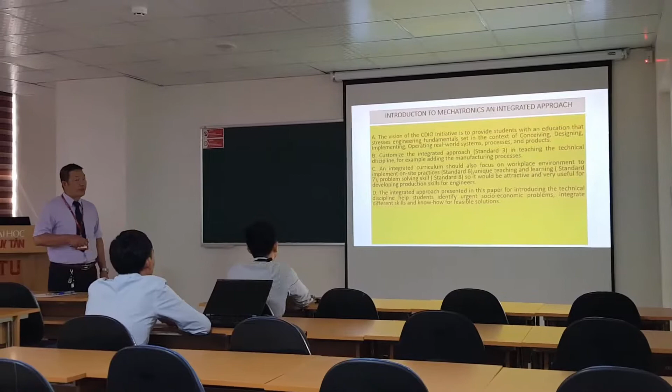First, the vision of the CDIO initiative is to provide students with education that stresses engineering fundamentals set in the context of four stages: conceiving, designing, implementing, and operating real-world systems, processes, and products.

The second point is to customize the integrated approach. Standard number 3, in teaching the technical discipline, for example adding manufacturing processes. Next, an integrated curriculum should also focus on the workplace environment to implement on-site practice. That's standard number 6. Unique teaching and learning is standard number 7, and problem-solving skill is standard number 8. So it would be attractive and very useful for developing production skills for engineers.

And the last one: the integrated approach presented in this paper for introducing the technical discipline helps students identify urgent socio-economic problems and integrate different skills and know-how for feasible solutions.

Here we introduce four parts. First, introduction. Second, CDIO standard number 2 and number 3, refocused for the conceive and design stage. Next, refocus of standard number 6, 7, and 8 in the implementation and operation stages. And the last one, conclusion.

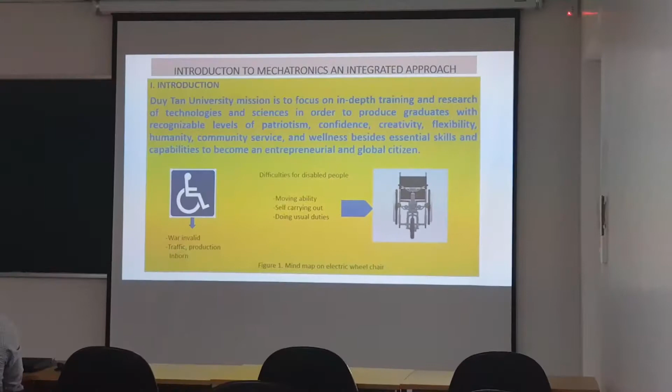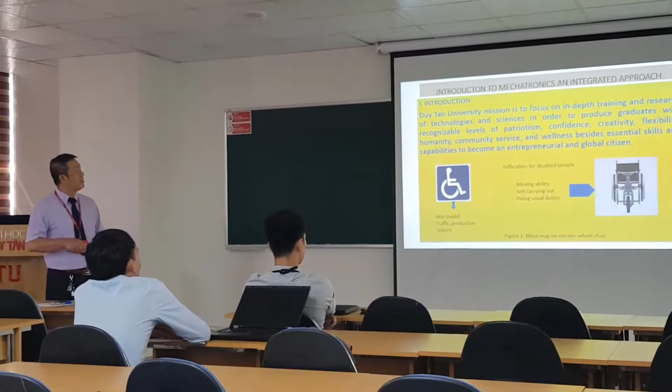Here I would like to pay some attention to the mission of our Duy Tân University. As I told you, I am working for Duy Tân University. Its mission is to focus on in-depth training and research of technology and science in order to produce graduates with a recognizable level of patriotism, confidence, creativity, flexibility, humanity, community service, and wellness, besides essential skills and capability to become an entrepreneurial and global citizen.

Here we pay attention on what? Humanity. And this is also the difference in my integrated approach, because besides simultaneously applying all standards in preparing the curriculum and in teaching, we pay attention to the humanity side of our teaching activity, and we will show how we can integrate this side in preparing curriculum and teaching our Vietnamese students.

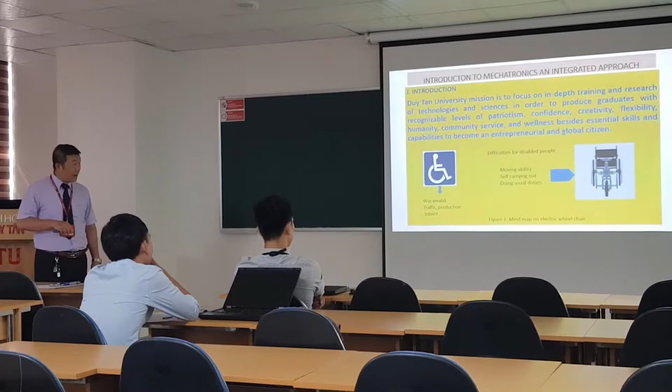As we know, the invalid may be so from the war, from traffic accidents, from production accidents, or inborn conditions. What difficulties do the disabled people face? First, moving ability. Second, self-care, which is very difficult. And the last, doing usual duties. So what can we do to help resolve this problem for disabled people?

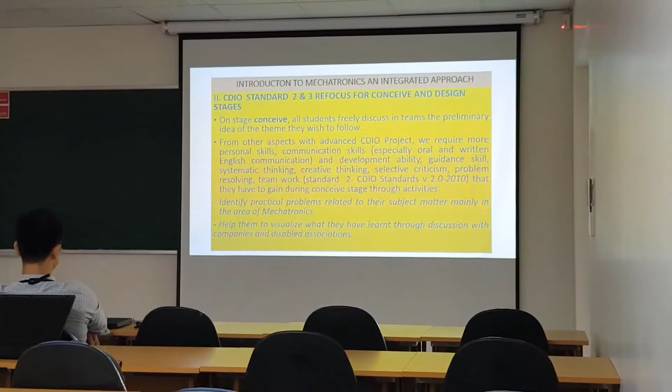This is a mind map on the electric wheelchair, and our students paid attention to this product. At the conceive stage, all students freely discuss the problem and they can propose any model, any opinion, and discuss among themselves. But the instructor always follows and gives advice as a coordinator, so that our teaching staff can help them develop guidance skill, systematic thinking, creative thinking, and selective criticism, problem resolving.

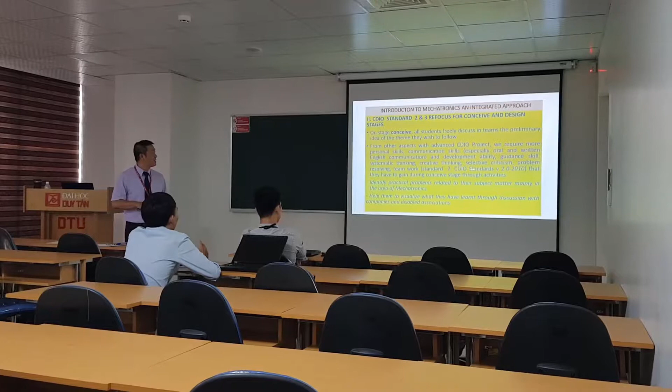This is the content of standard number 2 in the CDIO standard. Namely, the students have to identify practical problems related to their subject matter, mainly in the area of mechatronics. We also have them visualize what they have learned through discussion with companies and disabled associations. We encourage all students to be receptive to making changes in their initial plans based on the information they obtain in meetings with disabled people, associations, and companies.

We can also apply a flexible model to catalyze discussion, giving students a personal viewpoint on discerning information. But we focus on the problem—which problem might be social in nature or demanded by the company in the area of mechatronics. Because, as I told you earlier, we especially pay attention to the human side in teaching, in research, in all education activities. And this is different in our methodology.

We not only apply the CDIO standard, we apply several standards simultaneously in preparing and teaching education activities. But we also focus students' attention on the human side in education and in teaching technical discipline. This is the difference in our approach.

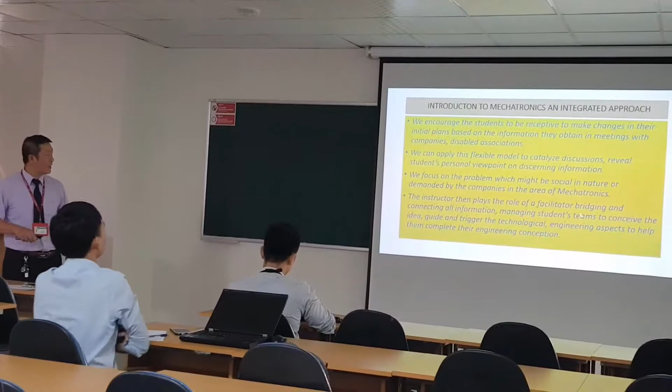And finally, the instructor played the role of facilitator, bridging and connecting information, managing the student team to conceive the idea, guiding and triggering the technological engineering aspect to help them complete their engineering conception.

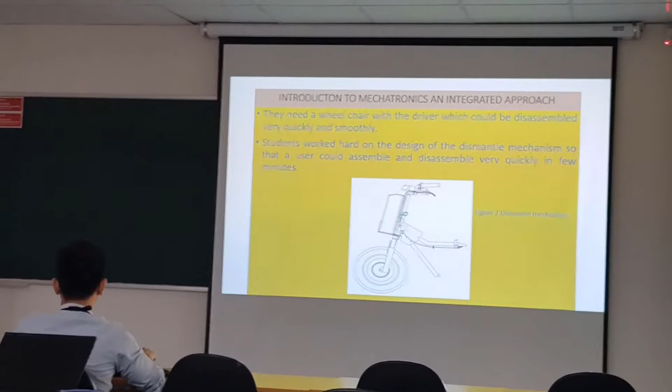What is difficult for disabled people? They face problems that make it very difficult to move and to do their usual duties.

So if we pay attention to something like a wheelchair, we have to design it to be very smooth and to quickly disassemble in a few seconds. It will be very useful, and students worked hard on the design of the dismantling mechanism, so that the user could assemble and disassemble it very quickly, in a few minutes. This is the core value of the students' design.

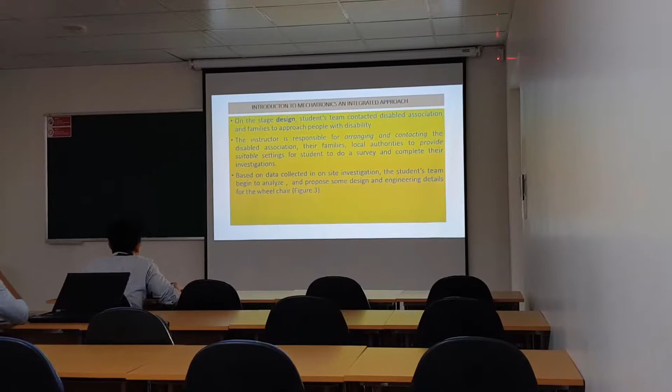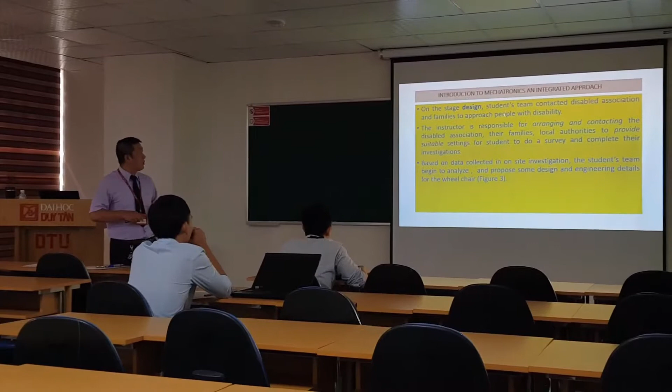So we finalize the first stage, concept. Now we pass to the second stage, stage design. The student team contacted the disabled association and even their family, so they can approach people in close contact and gather necessary information to improve their design.

What is the role of the instructor in this stage? The instructor is responsible for arranging and contacting the disabled association, their family, and local authorities to provide a suitable setting for students to do a survey and complete their investigation. Based on the data collected from the site investigation, students exchange opinions, analyze, and propose some design and engineering detail for the wheelchair, as we can see in figure number 3.

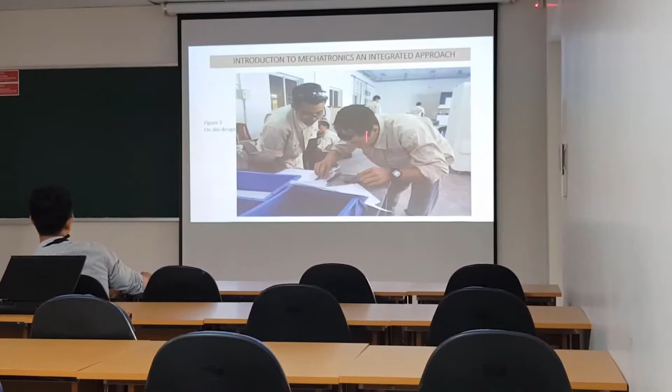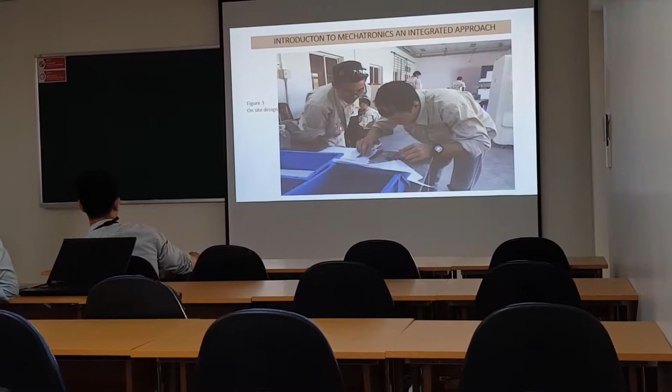Here, the student team in our workshop at the university is collaborating, exchanging, thinking, and finalizing the design of the wheelchair model.

Following a chain of 20 activities, all students are asked to actively suggest implementation of their models, fabrication proposals, and product analysis in small teams. They are required to collaborate, discuss, propose, critique each other, and provide feedback.

In this stage, we provide students the knowledge and experience in fabricating a wheelchair to improve practical and professional skills, and problem-solving skill. This is the content of standard number 8.

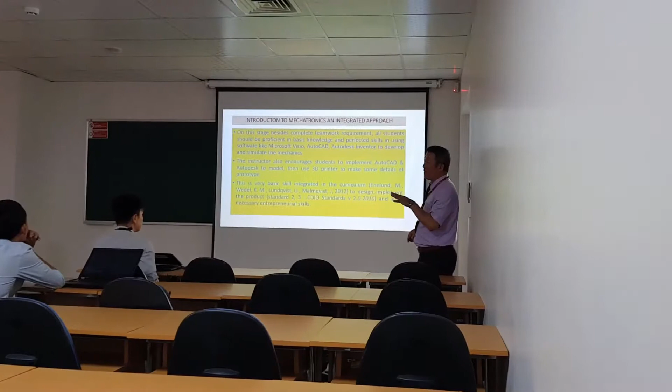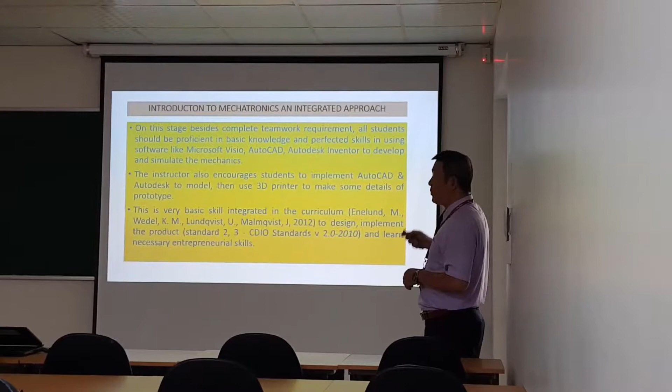At this stage, we show students the useful application of knowledge from other subjects and other tools to improve their implementation stage. Namely, we apply Microsoft Visio, AutoCAD, and Autodesk Inventor to develop and simulate the mechanics.

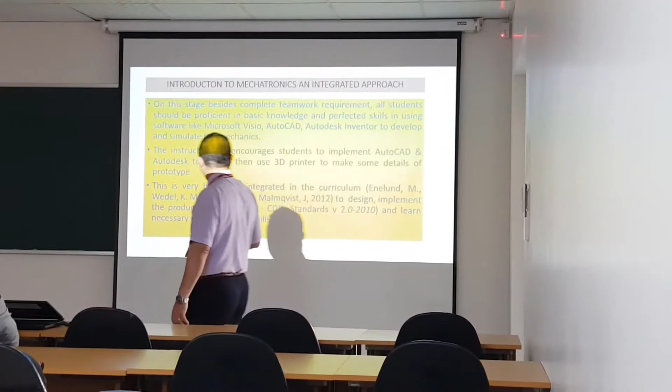We also encourage students to use AutoCAD and Autodesk to model, then use the 3D printer to make some details of the prototype. Students understood that this is a very basic skill integrated into the curriculum, to design and implement the product—standard number 2 and number 3—and learn necessary entrepreneurial skill.

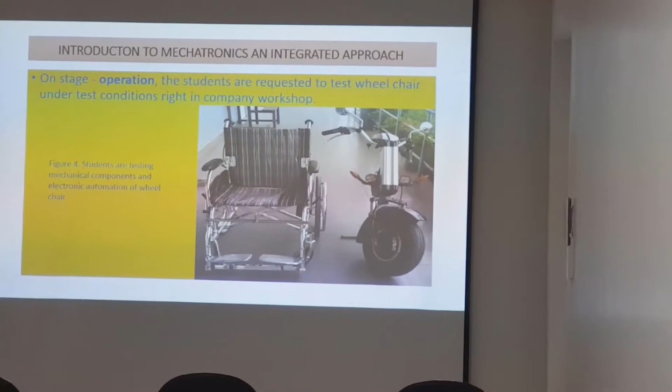The last stage, as we understood, in CDIO methodology is operation. What students do at this stage is test the quality of the wheelchair under test conditions, right in the company workshop. As we see here, under the guidance of our instructor, students test the wheelchair.

Here, a student has already finished the design of the wheelchair and engineered it in the CE workshop. CE means Center of Electrical and Electronic Engineering.

Normally, what is the difference in advanced CDIO projects? In advanced CDIO projects, we target additional tools, providing students more experience and entrepreneurial skill. So we have more criteria for evaluation: practicability, completeness, and flexibility in production conditions.

Normally, one project is evaluated by a complex series of criteria such as relevance, fulfillment of objective, efficiency, effectiveness, impact, and sustainability. As instructors, we follow all criteria, but we pay more attention to entrepreneurial skill and integrated approach in assessment.

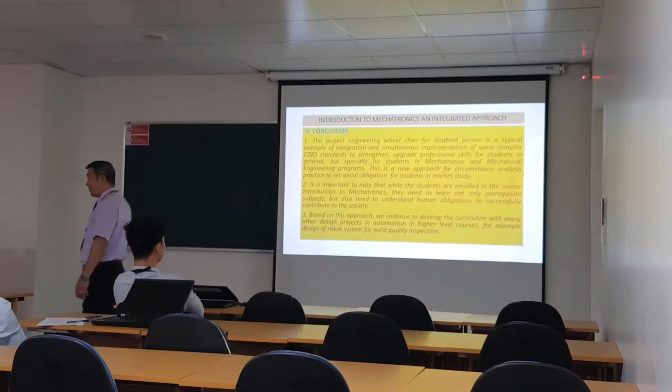Finally, we have some conclusions in our presentation. First, the project Engineering Wheelchair for Disabled Persons is a typical example of integration and simultaneous implementation of some complex CDIO standards. This is to strengthen and upgrade professional skill for students in general, but especially for students in mechatronics and mechanical engineering programs. This is a new approach for circumstance analysis practice, to set social obligation for students in market study.

The next conclusion we can make is that it's important to note that while students are enrolled in the course Introduction to Mechatronics, they need to learn not only prerequisite subjects, but also need to understand human obligation to successfully contribute to society.

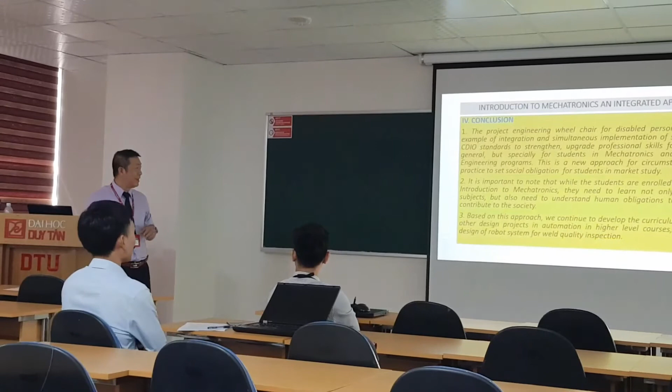And the last one: based on this approach, we continue to develop the curriculum with many of our design projects in automation, at a higher level, for example robotics—for example, designing a robot system for weld quality inspection. This is our next research, which we are doing in my center.

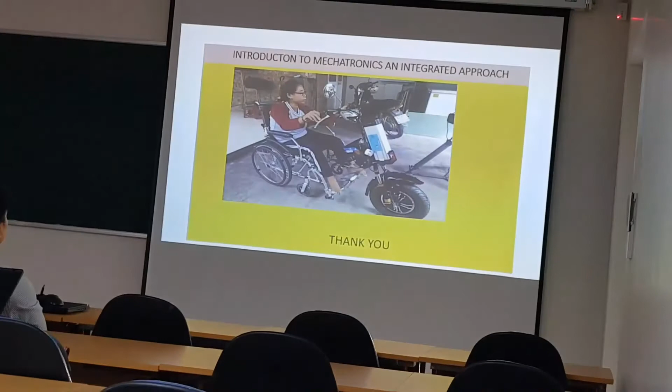Here we can see how happy she is when she got the wheelchair which our student team made by themselves and presented. This is the meaning of human activity in teaching, in preparing curriculum, in preparing program education for mechatronics.